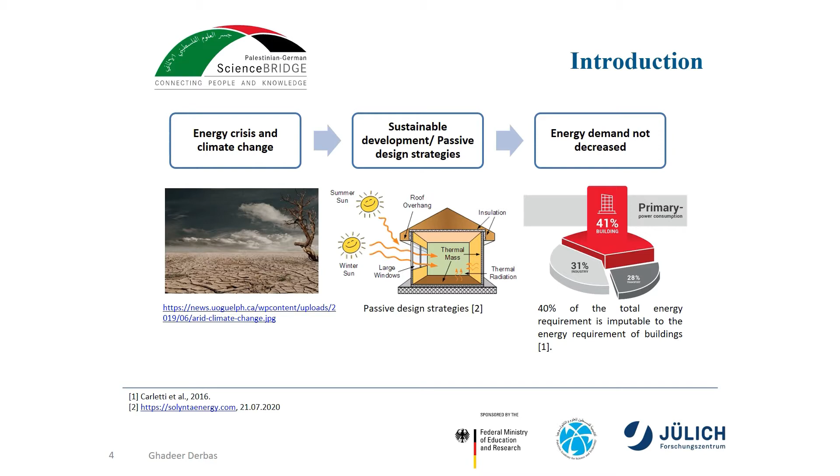During the last decades, there was a worldwide spread towards sustainable development because of the energy crisis and climate change. One of the designer's contributions to lower the energy consumption in buildings is to use passive design strategies such as super insulation, thermal mass, shading control strategies, and so on. Despite all these sustainable technologies, energy demand has not decreased. In fact, 40% of the total energy consumption is imputable to the energy requirements of the building sector.

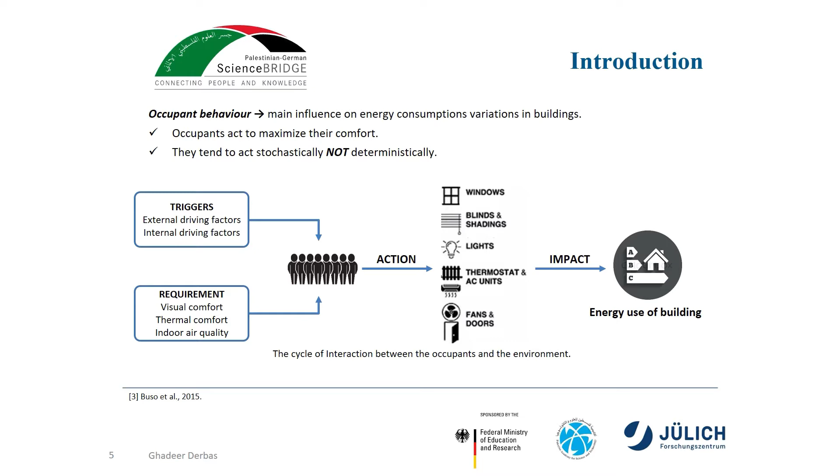Previous studies proved that occupant behavior had a major influence on the energy consumption variations in buildings because occupants tend to act in order to maximize their comfort. Here we can see the cycle of interactions between the occupants and the environment where they work. Usually there are external and internal factors such as indoor environmental parameters and weather conditions that trigger the user actions in association with specific users' requirements such as visual and thermal comfort as well as indoor air quality.

As a consequence, occupants interact with different building devices such as windows, blinds, lights, thermostats, fans, and doors. And they act in a stochastic way, not deterministically, because they don't have the same behavior. And these adjustments impact the energy use of the building.

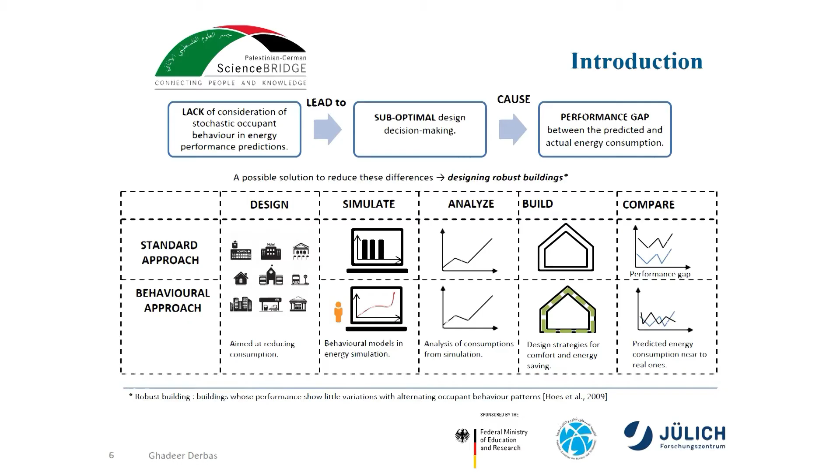There is a lack of consideration of stochastic occupant behavior in energy performance predictions, and this leads to suboptimal design decision making, which causes big discrepancies and a performance gap between the predicted and the real energy consumption in buildings. Through this diagram, one of the ways to decrease these discrepancies is designing robust buildings. Robust buildings are buildings whose performance shows little variation when using different occupant behavior patterns.

Through this diagram, we can see the difference between using the standard, deterministic approach and the behavioral approach during the design process. In the standard approach, the designers assume that all people behave in the same way, and in the end we end up with a big performance gap between the predicted and the real energy consumption in the building, while in the behavioral approach, designers consider the different behaviors, attitudes, and preferences of occupants, and they use stochastic behavior models in the energy simulation, and this decreases the differences between the predicted and real energy consumption.

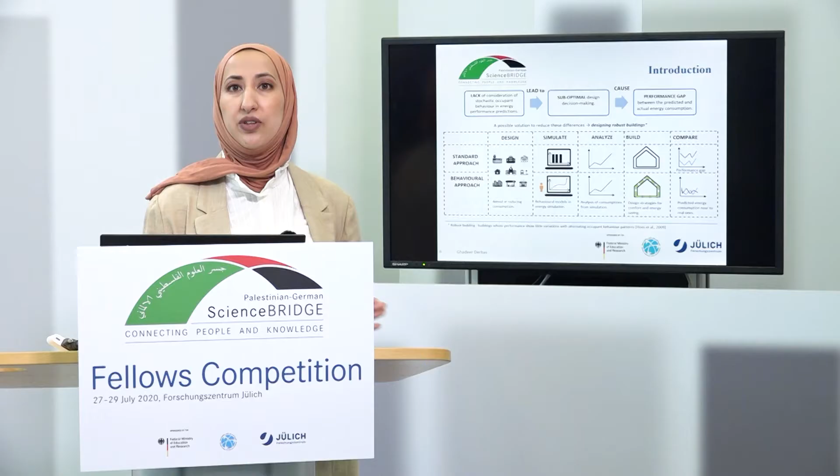The focus of the research is occupant behavior in office buildings because they consume more electricity due to the intensive use of HVAC systems and equipment. And designers tend to design fully automated energy systems in the building, such as smart and intelligent buildings. One of these systems is the automated shading system, which is considered a promising solution to improve the indoor thermal and visual conditions, as well as saving energy for cooling in office buildings.

Unfortunately, previous studies proved that there is a conflict between the expectations from the design phase of shading control strategies, as designers tend to use perfect controllers, and what occupants accepted and preferred. And this conflict means that occupants frequently override or disable the automated shading system in buildings, either indicating discomfort or implying their desire for a customized indoor environment.

So there is a need for further research to find the optimal set points to activate the solar shading system and to obtain more robust control strategies with limited overall actions by occupants. The research had 4 main methods. The first was a research investigation using a survey in 19 case studies.

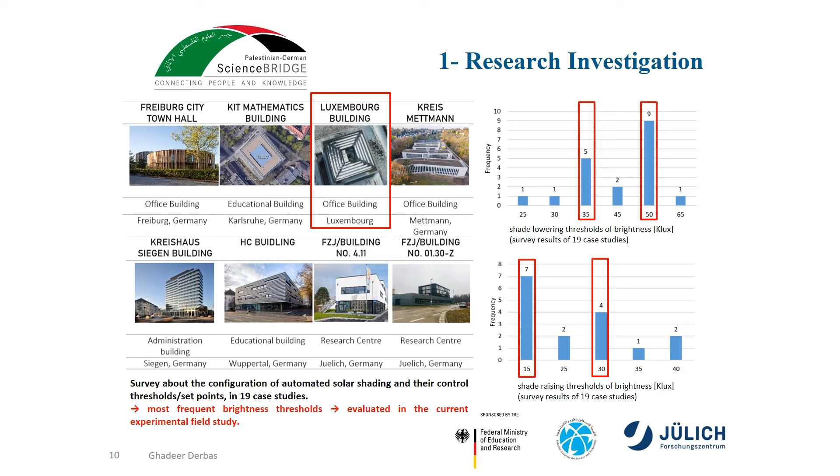In the right graphs, we can see the most frequent shade lowering thresholds of brightness: it was 35 and 50 kilolux, and in the lower diagram we can see the most frequent shade raising thresholds of brightness, which were 15 and 30. These thresholds were evaluated in the experimental field study.

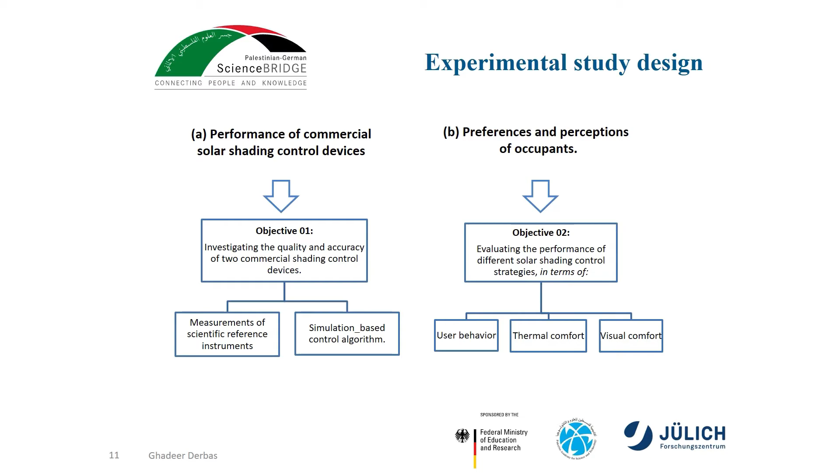The current experimental study hypothesis was that occupants may behave differently due to different performance of commercial solar shading control strategies, or because of different preferences and perceptions. So there were 2 main aims of the study. First is to investigate the accuracy and the quality of commercial shading control devices, and the second aim was to evaluate the performance of solar shading control strategies in terms of user behavior, thermal and visual comfort.

The experiment has been conducted in a full-scale test laboratory in Wuppertal University during the cooling season last year. 31 participants took part in the experiment. They were employees or students working at the center or at the university.

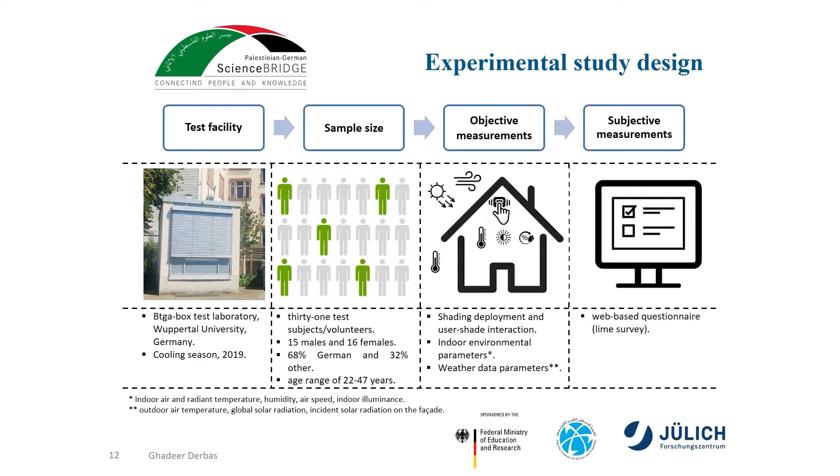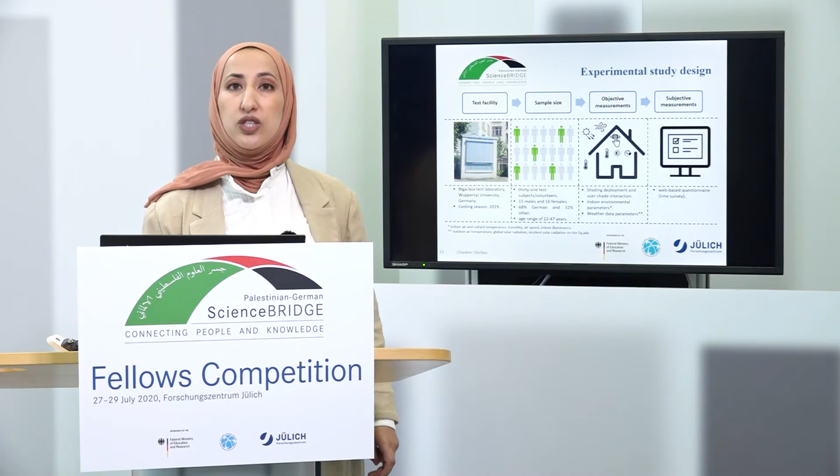Both objective and subjective measurements have been collected from the field study. The objective measurements included shading deployment and user shade interactions, environmental parameters, and weather data parameters. The subjective measurement was a self-reported web-based questionnaire from the participants.

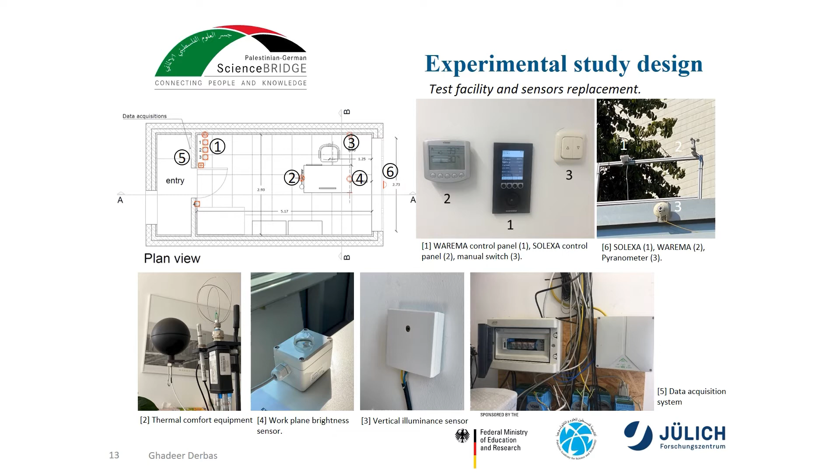Several sensors and devices have been installed in the test facility. Here we can see the plan view of the test facility with the reference for these devices and sensors that have been installed, such as data acquisition, brightness sensors inside the room, weather stations at the top of the roof, and also the control panels of these devices.

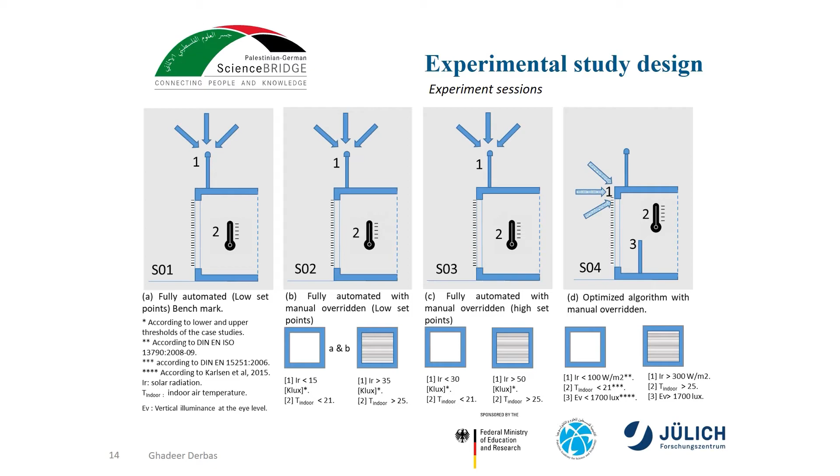The experiment had 4 main sessions. The first session was fully automated without the interference of the user, and the second and third sessions were a conventional and simple algorithm based on a brightness threshold to lower and raise the shade. And the last session was a proposed algorithm based on 3 criteria: indoor temperature, vertical illuminance at the eye level, and solar radiation on the facade. In the 3 last sessions, the users had the possibility to override the system.

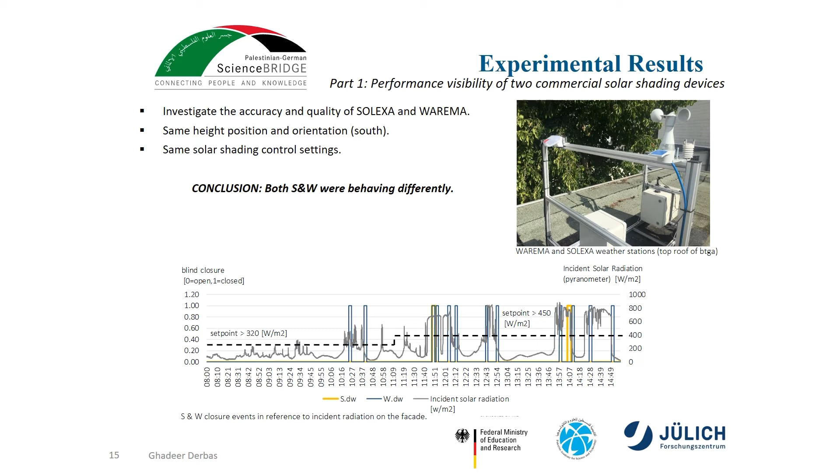As I said, the first aim was to investigate the accuracy and the quality of 2 commercial devices, SOLEXA and WAREMA. In order to ensure the same condition, both devices are mounted in the same height position with the same orientation, and they had the same solar shading control setting. As we can see from the diagram, the solar shade lowering events controlled by SOLEXA in the yellow line, and the solar shading lowering events controlled by WAREMA in blue, in the same reference day, both devices were behaving differently.

In order to examine their accuracy, the control actions of both devices were compared to 3 scientific reference instruments, as well as a programmed simulation control algorithm. As we can see, the first graph here shows the shading lowering events controlled by WAREMA, the second one the shading lowering events controlled by SOLEXA, and the last one is the shading lowering events controlled by the programmed simulation algorithm. It's the most accurate, as all the shading lowering events are when the brightness exceeded 300 watt per meter square.

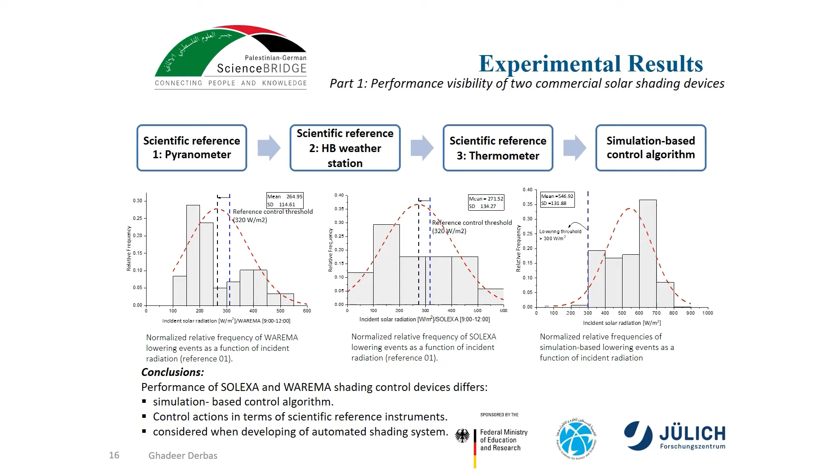So it is concluded that both devices were behaving in a different way from the control algorithm and from the measurements of scientific reference instruments, and these properties should be considered in the development and design of automated shading systems.

The second aim was to evaluate the performance of different solar shading control strategies in terms of three factors: user behavior, thermal comfort, and visual comfort, in order to find the optimal set points with limited overrule actions.

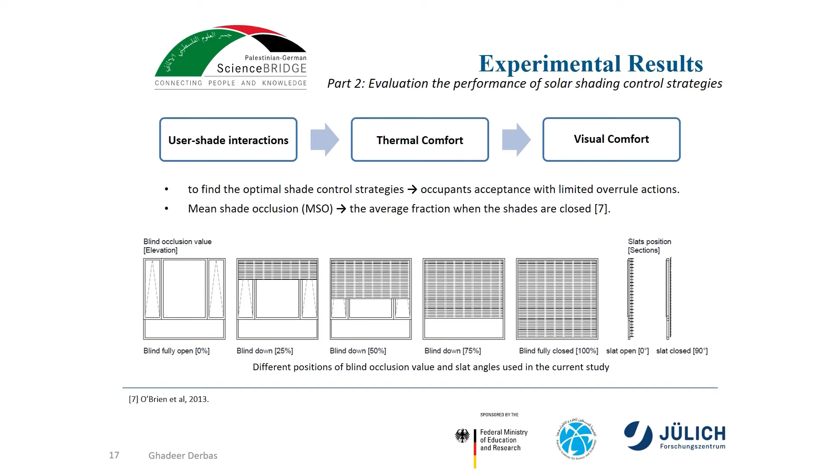Mean shade occlusion is the average fraction when shades are closed. Here we can see there were 5 blind positions used in the analysis. 0 means fully open, 100 means fully closed, with also 2 slat positions of the blinds. 2 metrics were used to evaluate the user behavior: the mean shade occlusion and the frequency of shade adjustment.

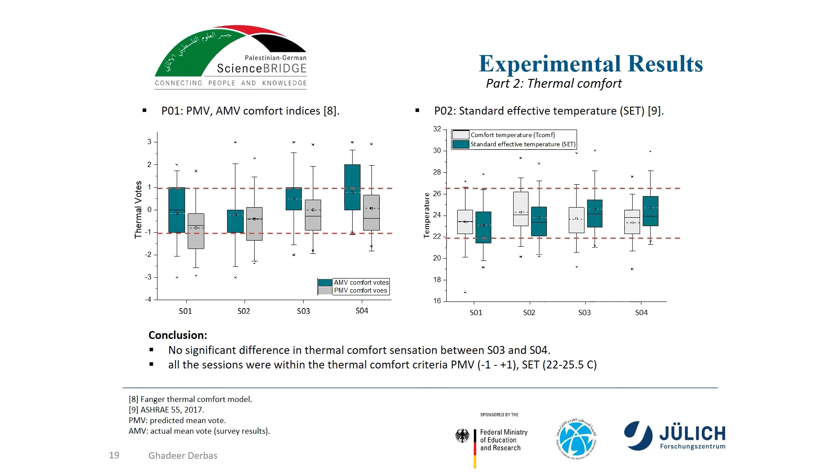2 indices, PMV, predicted mean vote, and standard effective temperature, were used to assess the thermal comfort conditions also through the 4 sessions. Also, it can be indicated from the graphs that there were also slight differences in the PMV and AMV, predicted mean vote and actual mean vote, during the 4 sessions; all the sessions were within the thermal comfort criteria.

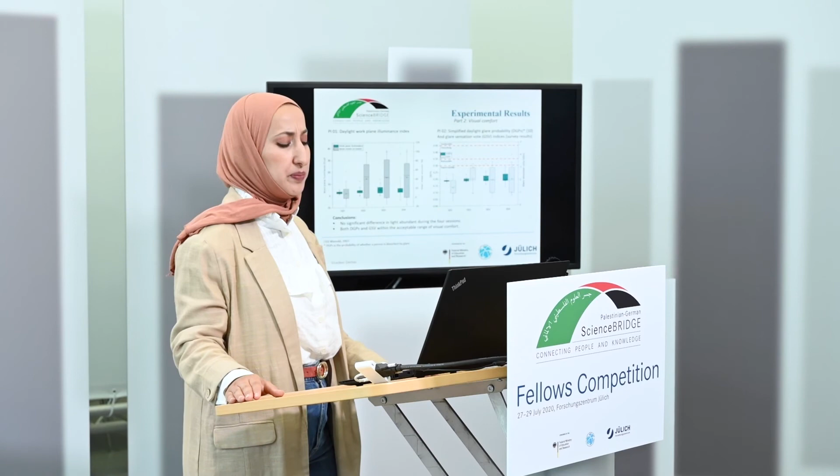Last, daylight comfort and DGPs, simplified daylight glare probability, were used to assess the glare and visual discomfort during the 4 sessions. There was also no significant difference between the sessions in light abundance and even in the DGPs and GSV, glare sensation vote, through the 4 sessions.

The non-significant differences between the conventional algorithm in sessions 2 and 3 and the proposed algorithm are due to the limited accuracy and quality of the commercial shading control devices, because the sessions were based on the set point, and these set points were not accurate because of the inaccuracy of these commercial shading control devices.

So the experiment will be done again this year, and it already started on the 7th of July and it will last until the end of October. In the new proposal for the experiment, the shading control will be based on the programmed control algorithm, which is more accurate, instead of using the commercial shading devices Warema and Zolexa. Also, the number of participants was 31 instead of 43, because it's hard to collect more volunteers.

The new experiment had 3 main parameters to study their impact on the user-shade interactions. 2 solar shading control strategies were evaluated: simple and multi-objective control strategies. 2 window-to-wall ratio sizes were evaluated, and naturally ventilated and air-conditioned spaces were evaluated. Here we can see the new proposal for the new experiment.

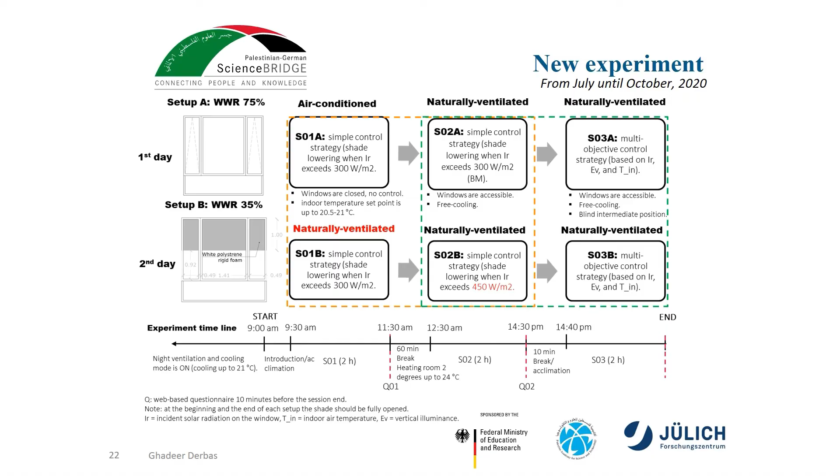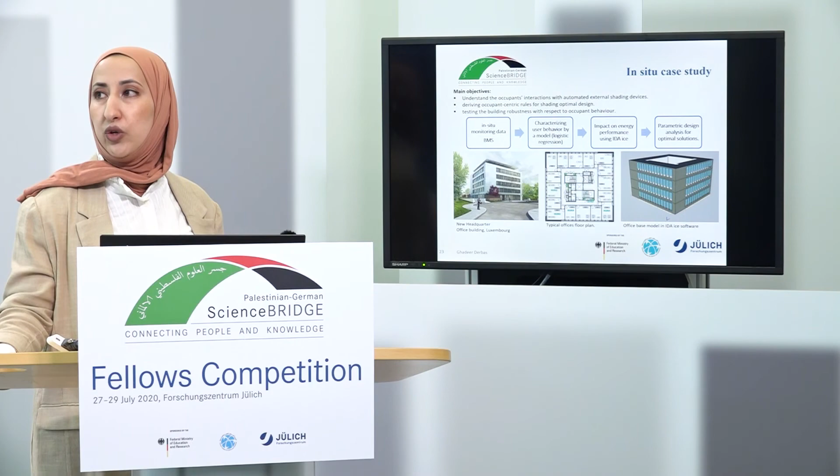The last project is the in situ monitoring case study. It's an office building occupied since 2017. The main objective of the case study is to understand the user interactions with automated shading systems in real office buildings and to compare them with the user interaction in laboratories, as I did in the experimental field study.

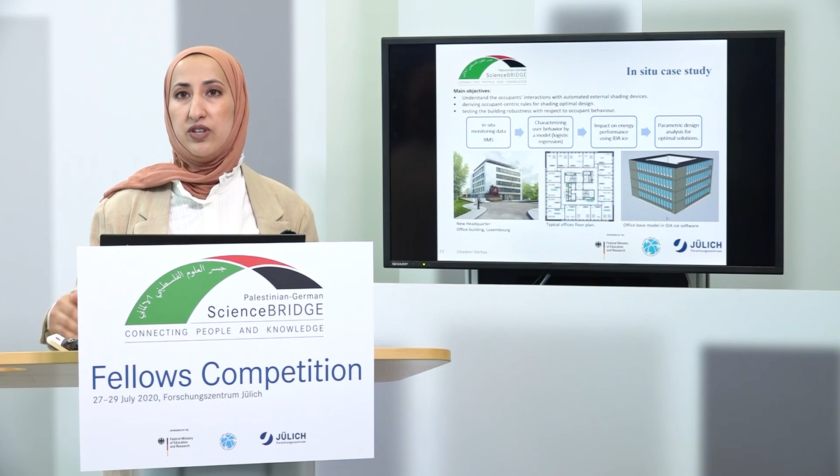And also deriving occupant-centric rules for optimal shade design and testing the robustness of the buildings in terms of user behavior, by characterizing a model using logistic regression models and studying their impact on the energy consumption of the building, and using different parametric designs with the same occupant behavior patterns to see how this impacts the energy consumption of the building at the end.

The research outlook is to finalize the current experimental study. It will end at the end of October. Then data analysis of the new experiment, the Luxembourg building statistical analysis, and the simulation analysis based on the statistical analysis of the case study. And that's everything. Thank you very much.